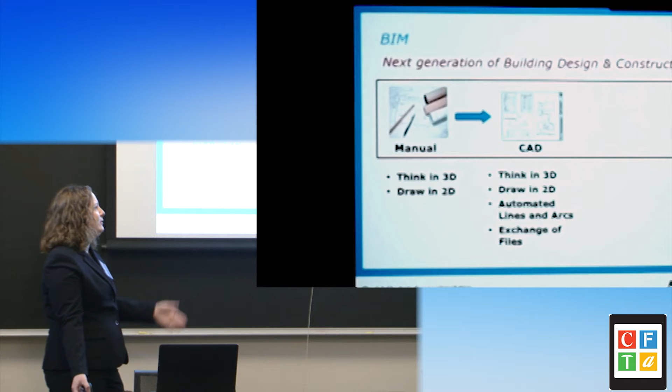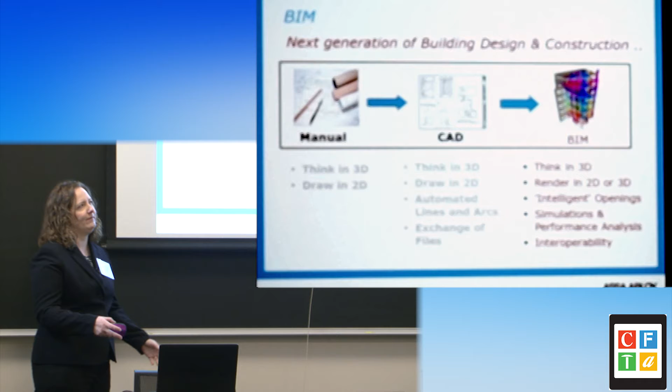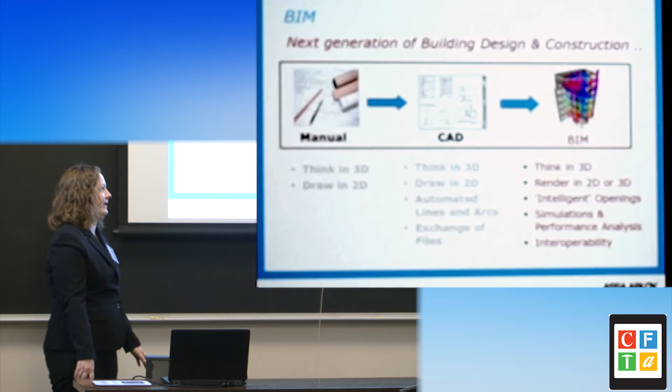This kind of goes into, a lot of people are still here, actually a lot of people are more like here, still thinking in 3D but doing a lot of things 2D, and they're trying to get into the 3D world. That's certainly where we're at. We're trying to build more intelligent openings, even though a lot of times that's not going past the architect. That information is there and could eventually be passed on. We've really set ourselves up to do BIM well, as many of our competitors have done the same thing. It's not just us, anybody involved in doors is starting to think this way.

Go ahead, question. I assume that's a characteristic you're looking for in an architectural firm, someone that's utilizing BIM, as you're selecting that product.

Okay, so contractors are actually moving faster with BIM now than architects are. I don't know if you've heard that number before, but that was kind of new to me about a year and a half ago, that architects were kind of slow to get started, but contractors just basically went straight up with it. They grabbed onto it and ran with it because they can save money using BIM. That's a great thing for a contractor. It's a good thing for architects too.

And then federal, state, and private entities are jumping on board with BIM and have BIM standards and things like that going on. Just last week, we heard from the Army Corps of Engineers asking questions about what they could do for doors with BIM. So they're all thinking about it and processing it.

So, what programs, where does Doors fit into all of this? Well, there's a lot of stuff out there for BIM, MEP, structure, that kind of stuff, but doors are tougher. So you really have to have somebody that really, really, really understands doors and hardware.

It's just across the board. You can see there's a lot of plumbing ones going on. They show the federated models where you bring the structure and the plumbing together. They do things like clash detection—do you guys know what clash detection is? Yeah, and very good about that. And that's something to think about too. When I talk about the families, I was going to bring that up—clash detection is something to think about with doors too, with things like ADA clearance lines and door swings, because you can run into things like ceiling signs and things you don't know about until the project is out.

I got another question, sorry, I interject a lot. What's driving the initiatives from a university standpoint of collecting this? It seems like there's a shift of treating doors, frames, and hardware as assets in your system. Is that just something internally that's a kind of buzz thing going on, or do you guys even know what I'm talking about? I've seen a lot of schools—I work closely with Penn State, and they're moving all doors, the reason they're capturing those exterior doors is because they want to consider them as assets. What does that mean? Is that something in your own invoicing and PO processing work orders, that an asset is something you're looking at the return on that investment more so than just an expense item?

Well, indirectly for us, because it's a deferred maintenance item, and our deferred maintenance funding from the state got cut. At the same time, we sort of discovered that the code application, as it had been applied, is different from how it should be applied. So we're trying to document all our fire doors and egress paths and stuff, and make a deferred maintenance plan. Obviously, doors and latching and fire doors are a big part of that. So we're trying to prioritize all this stuff, so that we can take what smaller deferred maintenance money we have and apply it in the right way to the highest priority stuff.

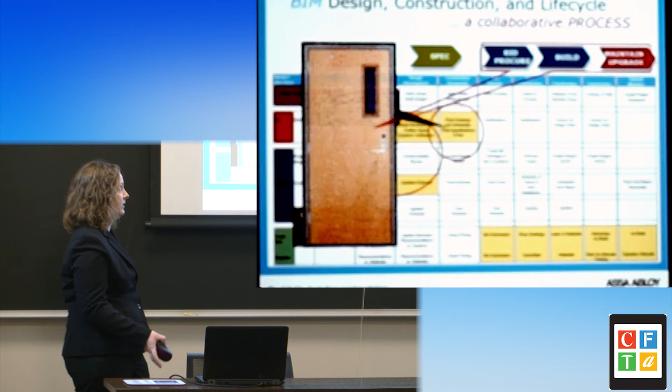Using that data to populate a specification, then sending it to the second part of the process, the bid or the procure, and extracting that information to send to a distributor. It's really about not having to recreate information. Historically, the architect has drawn their plans, the specification writer has picked up those plans and done their part, and then the distributor takes the same thing and redoes it again, and the contractor redoes it again, and then the owner gets their building, of course, but why is everybody redoing these pieces of the puzzle when you could just be reusing that information?

So it's no longer 'it's your problem, not mine' when something breaks down on your side of the process. It's everybody working together for a more cohesive workflow. That should be BIM in general, not just with doors and hardware and access control, but that is a battle we are fighting.

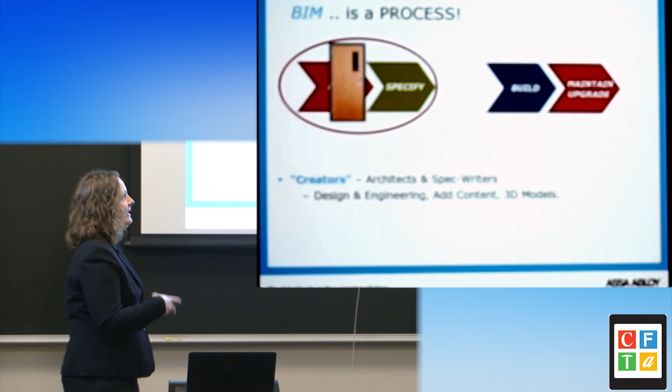Then the last part goes into this: there's the creators, the architects and specification writers who are designing, adding content, building models, and then the consumers, which tend to be contractors, owners, facility managers, all of that.

The piece that's kind of hurting us, and it's not that it's hurting us, but we're still working on, is really the distributor level. The distributors are the ones that are going to tie it together. They're the ones that actually supply the product. And right now, they are the most behind out of everybody.

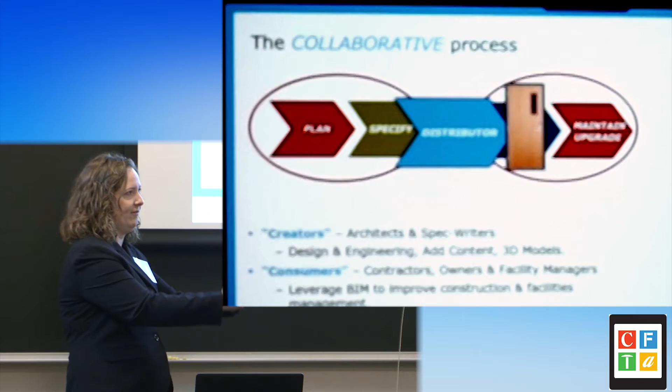It's really going to take contractors, owners, and facility management to say, this is a BIM project, I expect the distributor to be working in BIM or some level of BIM as well, because they have to be able to provide the contractor the supplied version, what's actually being purchased. A lot of times what gets written in the specification isn't actually what ends up on the job site, either because it changes manufacturer or the opening changes, somebody at the last minute added a door, changed something, and the distributor is getting that information. The specification writer may not be, but the distributor is.

If the distributor can hand that off, the contractor starts at a much better place because they actually have the product that's going to be on site.

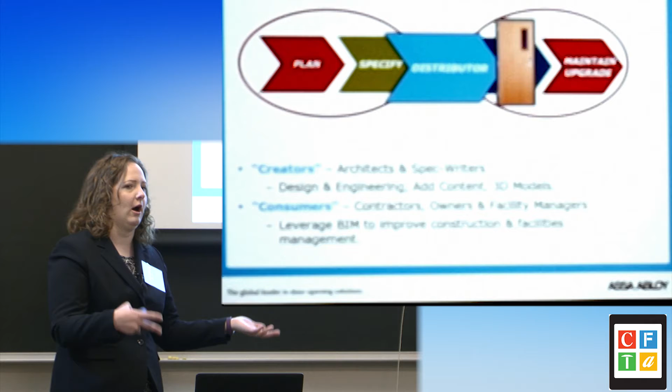They're starting to invest in their own access control teams because they're realizing there's business out there that they're missing. Everything's moving towards electronics, so wires are going to be coming out of it as one example. So they are coming along.

The second thing is there's a lot out there that are now focusing on lean construction too. That's a big thing Assa Abloy is actually involved in. We have Norwood, a huge distributor out of Cincinnati—when we deliver them product, there's a lot of pre-drilled stuff in the doors, the holes, and then they go in and actually install the hardware in their facility. So when it gets to your job site, it's actually ready to go up. You're cutting out the waste and the chances of something not going right. So everything's done there, there are major distributors doing this.

As you're evaluating your distributors in the marketplace, figure out the ones that are going to actually come along for the ride with you and link that together. They are there, it's just that you could have someone in the same market who is so far ahead, and someone you've still been buying product from that is so far behind. Where do they fit? It's something to keep in mind.

I don't know that any distributors are still working on paper, but there's many still working in Excel. And there's half a dozen or more distributor softwares out there where they can actually communicate directly with the factories through that software. So just something to think about.

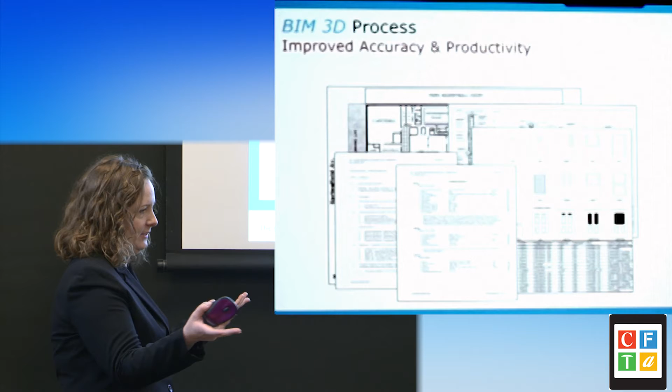Something that has really driven us forward, and something anybody that writes door hardware specifications knows well, is there's a lot of pieces to the puzzle. Traditionally, there's floor plans, door schedules, door elevations, codes, details. All of those pieces need to be compared and put together, like an architect laying everything out on their desk with all these parts, having to reference all these different pages.

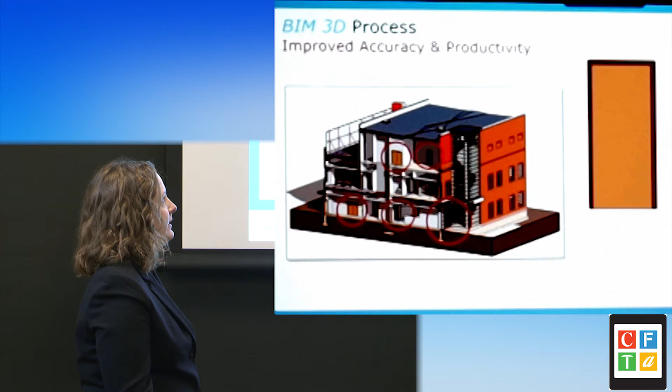BIM has made that better for us because it puts everything in one place. We're able to utilize that 3D geometry, pick up a door, and get all the information revolving around that door at once, without relying on somebody to make sure they're looking at the correct line in the door schedule and seeing that it's fire rated. So that brings us to how do you get BIM in a useful format?

That's a really big thing, because you may start getting as-built models from your architects or contractors, but is the information in them actually useful? There's a lot of junk that goes into models. I've seen a lot of architect models with so much information that's just wrong, because they're not really being required to deal with that information. Nobody's looking at it, so getting it in a useful format is a good information in, good information out kind of thing.

The question is, how can the industry give this information to you better through BIM tools? It's something we're thinking about, our competitors are thinking about, anybody that deals with doors is really thinking about. And it all comes down to what will be the new conventional process. When it's conventional, it won't be new anymore.

Somebody gave me a great analogy the other day about when the world switched from knobs to levers. They were a distributor at the time, and they went out to a bank, and the guy was so upset about all these levers, saying he didn't understand why they needed levers on the second floor since people in wheelchairs can't get up there anyway, not considering that levers aren't just for people in wheelchairs. But it was because it was so new and everybody was fighting against it. Now levers are very common, you don't get anything else.

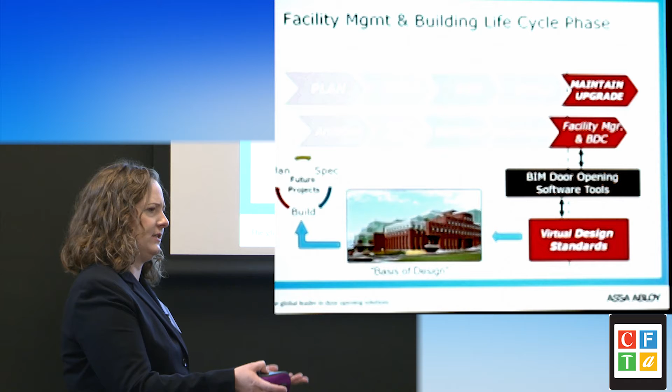Facility management, I talked about this in the Spark session too, about how you can be on the front end or the back end of a process, either by creating your design standards up front that you require your architect to use, or you can use it for facility management at the end. You could also take an existing project that's already been completed and turn that into your design standards. That's a good reason to go through that whole process. At the end you say, hey, we loved our set of door families on this, we want our architects to use these on every project going forward. Something to think about.

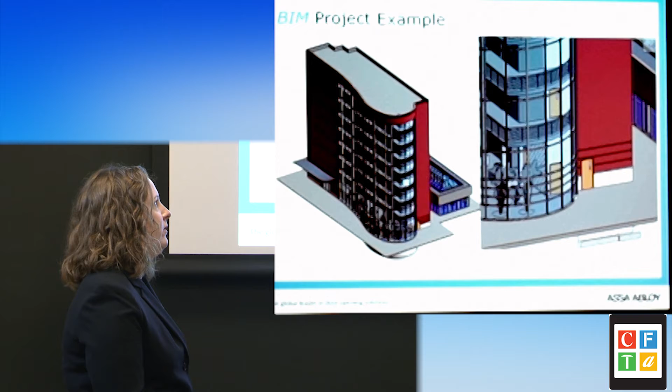And there's software, of course, that doesn't utilize Revit, that can pull information out of Revit, or MicroStation, or ArchiCAD, whatever you're using, and pull it in and look at information in a different way, and it trims it down. Does everybody know what a federated model is? There's plenty of things that do federated models, pulling that together. There's all these different softwares, so you have lots of different options, which is great when you're looking at what you want to gather, what information you want to review.

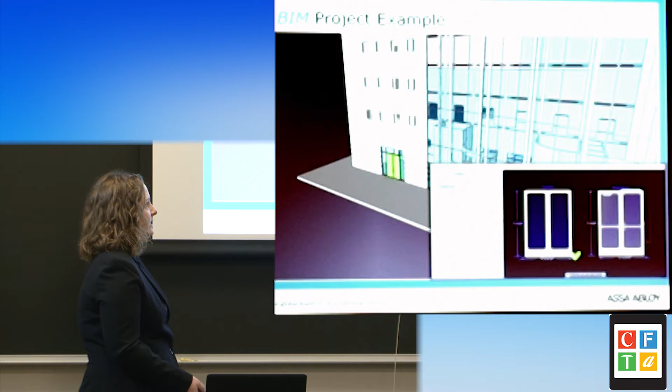It's important to look at as many softwares as feasible to really find the one that fits what you're doing. So you can have intelligent Revit models full of parameters with good information in them. This shows some parameters that tell you things like what the cost of the frame is, how it's welded, all of that good information, plus probably much more. You can do that, or you can store that information elsewhere.

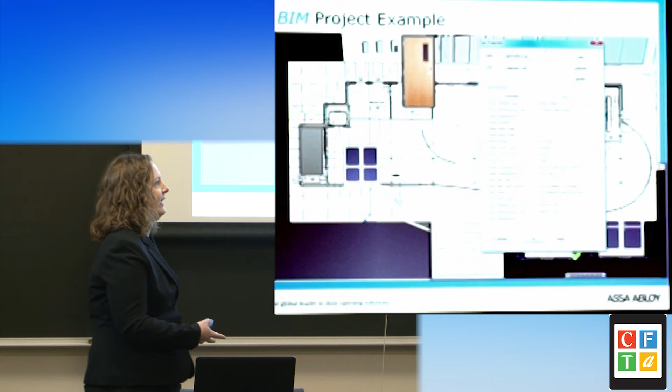There's some debate about whether you should store all of your information in Revit, or have other programs store your information. I think it was a presentation from HOK discussing where you should save your information—should it actually be in the Revit model, or could it be in other programs? I thought it was a very interesting way of looking at it, because a lot of architects think you have to put everything in Revit, and you don't.

Question—got three universities in there. What kind of facility management software systems are you using? I've heard Maximo thrown around, I've heard AiM. Just to see what kind... FAMIS? Okay. Homegrown? Homegrown, but it started out as FME. Okay, gotcha—FAMIS, okay, interesting, okay.

Now, is this tool, as you guys start collecting this data—obviously this is not to replace your facility management software, it's kind of to complement it, so people can have access to this information and see where the doors are at. Is this something you guys see as needing to integrate into your current facility management software? Or could you say, if we have a question about what's on a door, you have a client workstation set up, go into the software and visually see it, or your maintenance person can see it? Is it crucial that it integrates into that system?

So yes and no? That's a great example of how it's different. Yeah, because it would have to be in our FAMIS system, I think. Okay, so what can you see in that? They're not going to go to a different system for this stuff.

Gotcha—they're going to go and do it where they do everything else, because there's not, at least at Iowa State, just a door person; they do everything. Okay, so they're doing multiple things, so they're not going to go to different systems to look things up. So when they go to FAMIS, what do they do—if they have a question, say they get dispatched, I don't know if you guys are split into zones or districts, but however that shapes out, they get dispatched to zone 4, there's an issue with the opening.

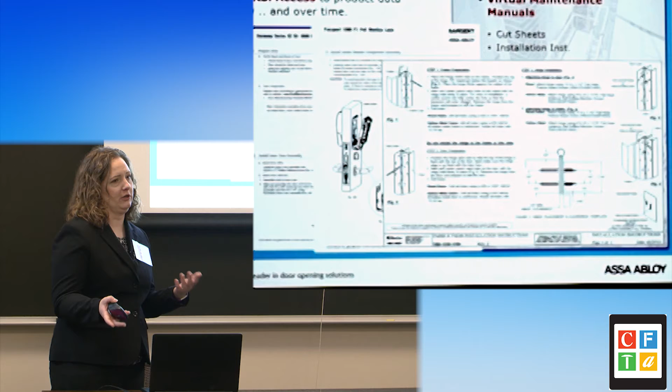Does your maintenance staff know how to reinstall a new exit device if they need to do that? Where is that information at? How do they get it? Things to consider: wiring diagrams, which can be very important when you're sending somebody out to do maintenance work, if they understand what power comes to that door or where the power is going from that door.

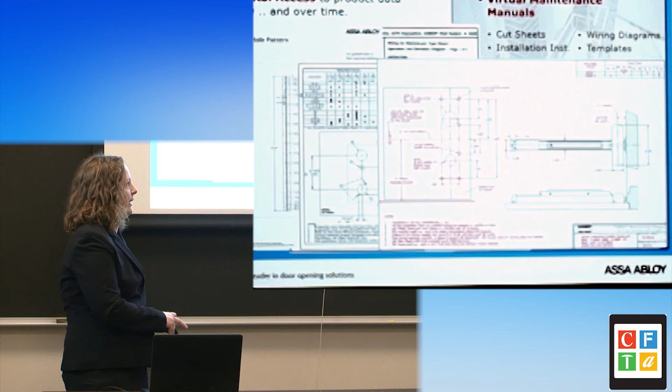And templates, which also ties into installation, like templating exit devices. Closers, you have to template very specifically, otherwise the door may not open far enough or the closer may rip out of the door. So that's really important stuff. It's really important to know when doors are supposed to swing 180 degrees for that same reason, and how they template those closers.

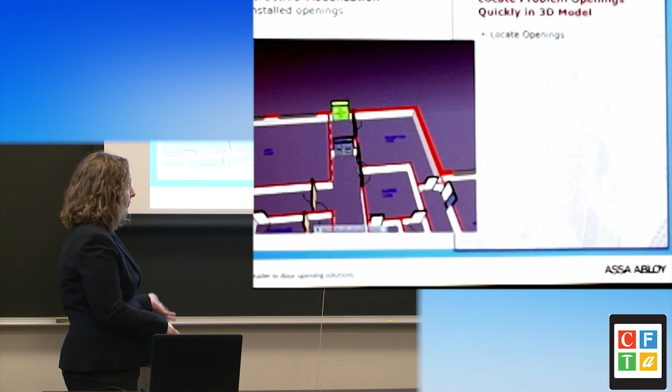Just being able to visualize what your openings look like, finding them easily. It should not be a long process to figure out where an opening is on the floor plan. You should be able to find that information quickly, understand the frame information, the door information, and then the hardware information as well.

And I know there's some software out there that does this where you can shut off different things, like you can shut off the floors so you can really get a concept. You know how I talked earlier about linking out to the cut sheets for the doors? Could I link from FAMIS to this floor plan, like an external link, and just open up like this?

That's a good question. Talk to us afterwards, and we'll see if that's an option, because we probably have to go back and talk to a developer and find out. But I bet you could. I bet you could.

And tracking and reporting, yearly inspection, product replacement. We've been talking about that. That's kind of a big thing that you need to do.

So I have two slides left. This is the second to last. So where's the value in using BIM and hardware and openings and access control, all of that?